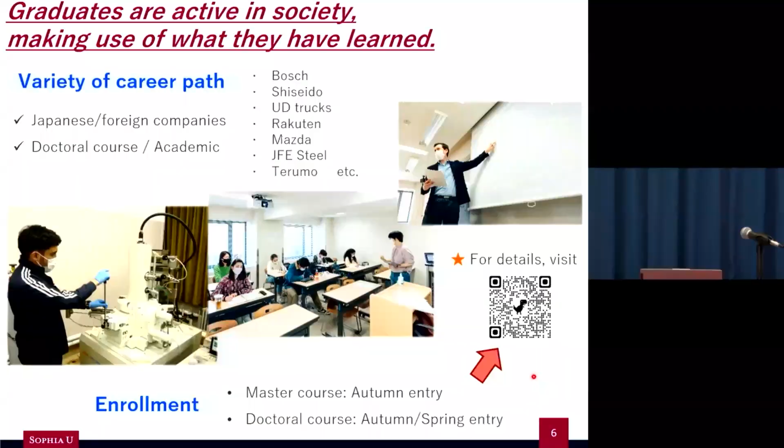Firstly, I would like to introduce myself. There's a point to it. You might ask why is he introducing himself, but we'll get to that.

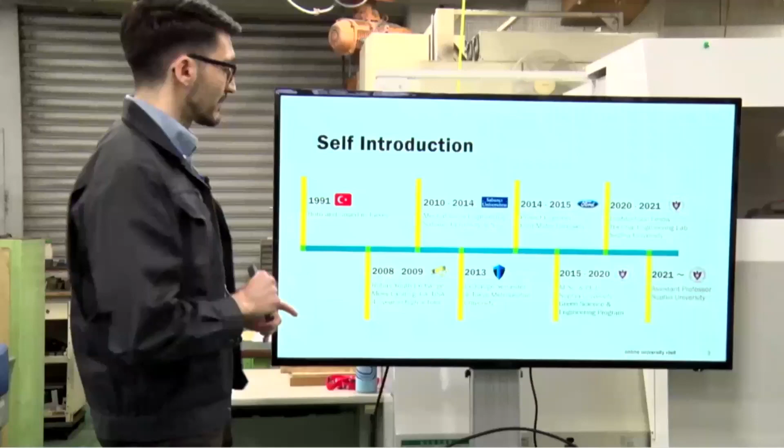Basically, I was born and raised in Turkey. I was there until high school, and in the fourth year of high school, I went to the United States as a Rotary Youth Exchange student. After 1 year studying there, I came back to Turkey and did my bachelor's degree at Sabancı University.

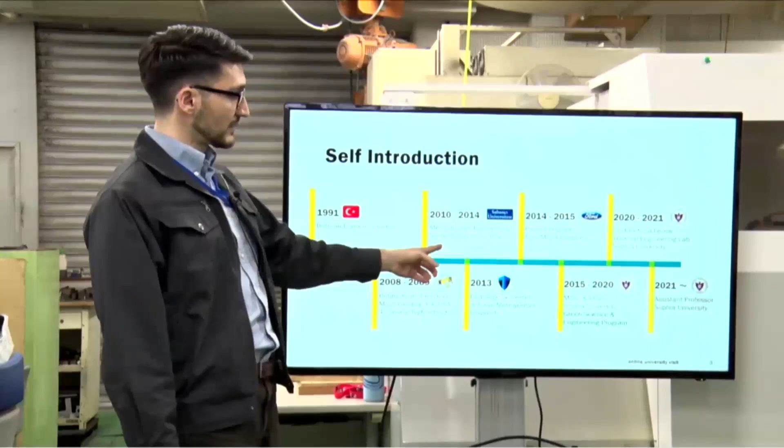During that time, I actually came to Japan for the first time, to Tokyo Metropolitan University as an exchange student, and I was partially funded by JASSO, actually. So thank you very much, JASSO.

After my studies in Japan for 6 months, I came back to Turkey, finished my studies, then got into Ford Motor Company and worked there as an engineer for 1 year. During that time, I realized I wanted to do a bit more technical stuff, and I looked into some options.

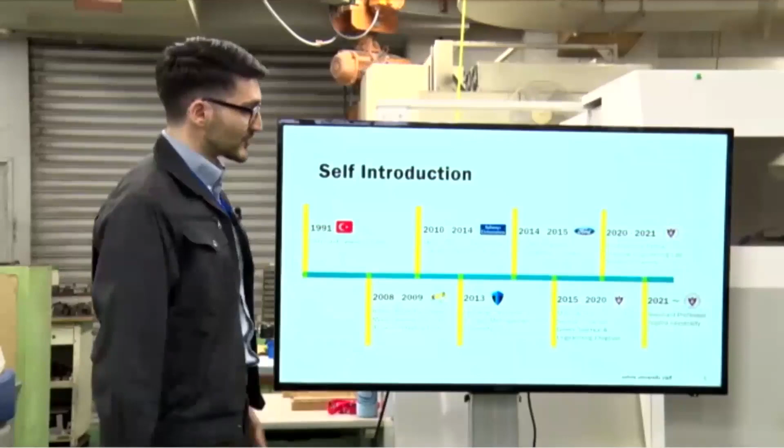As previous professors mentioned, Sophia University had an English program, which I didn't know about, but it came up online. I applied and got into the program, and I am basically a product of this Green Science and Engineering program. I've been here in Sophia University since 2015, did my master's degree, PhD, a postdoc, and since 2021 I work here as an assistant professor here.

So enough about me, let's go back to the university. As previously mentioned, the Faculty of Science and Technology has three different departments. Here in the Department of Engineering, we have 3 different areas. In mechanical engineering, we have 7 different research groups, and today I will talk about precision engineering.

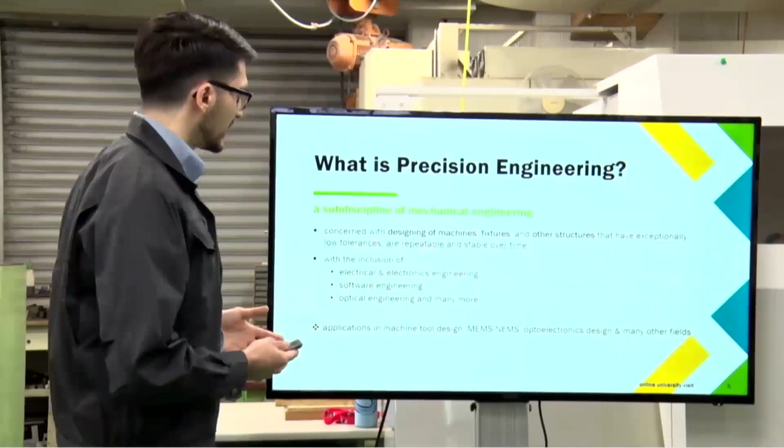So you might ask yourself, what is precision engineering? We can define it in simple terms. It could be defined as a subdiscipline of mechanical engineering. What we mostly concern ourselves with is designing machines, machine elements, fixtures, and other structures that have exceptionally low tolerance. So when I say low tolerance, let's see, this is a pointer.

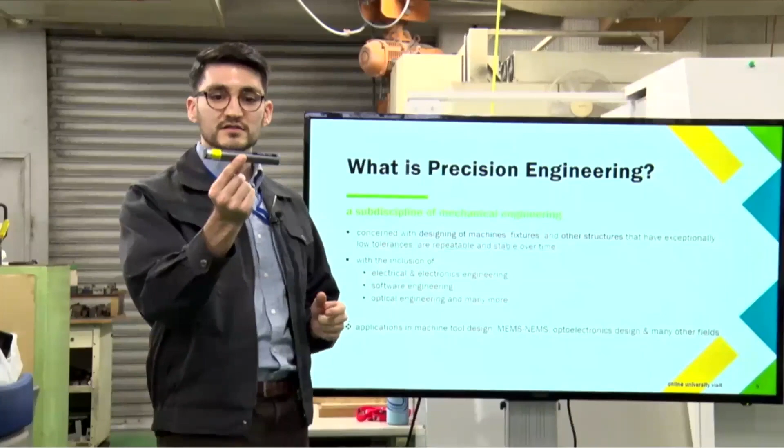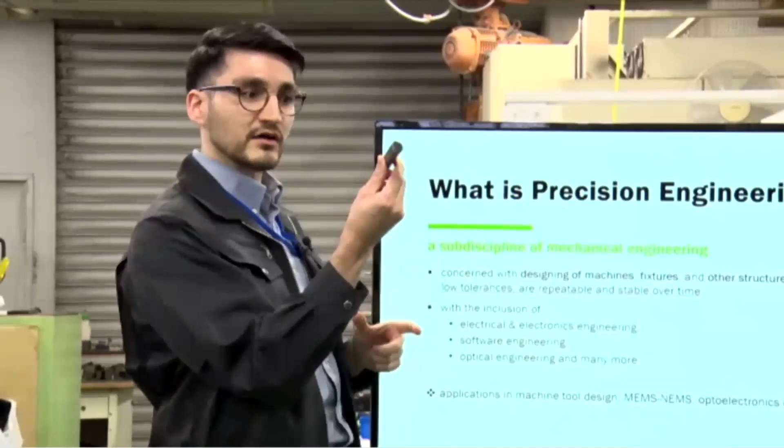First of all, you have to design it on paper, in a computer-aided design environment. So you set a dimension for its length, its width, or its depth. In precision engineering, we like to do those paper-written designs, and when you actually manufacture it, those dimensions need to be matched almost perfectly together. So we are talking about micro,

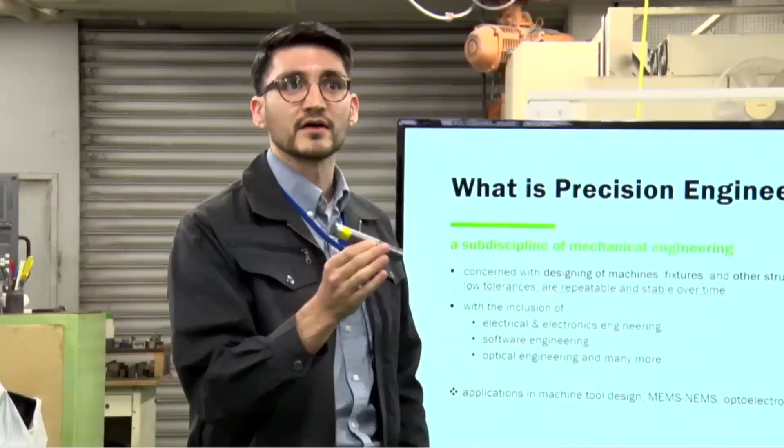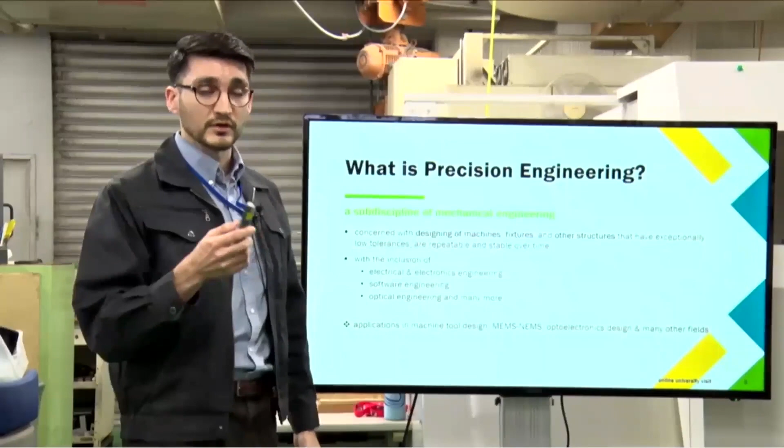nanometer level accuracies. When we do that, if you have low tolerances, you can basically have your products be repeatable, and you know that if you did the engineering calculations correctly, they're going to be stable over time, so you can use them for long periods of time. But of course, precision engineering, even though it's a subdiscipline of mechanical engineering, shortly we will see in our demonstration phase as well that we deal with electrical and electronics engineering, software, and even sometimes optical engineering as well.

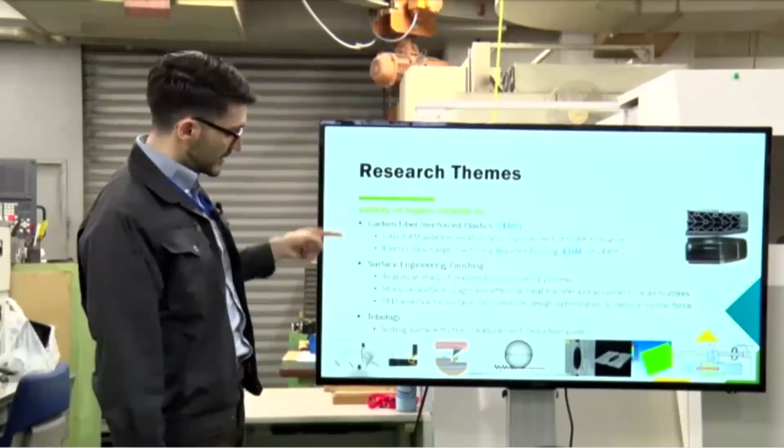For our research team in Sophia University as the Precision Engineering Research Group, we are mainly focusing on CFRP, carbon fiber reinforced plastics. You might have heard about it. On paper, these CFRP materials are hard to process, hard to shape, hard to cut. So in our laboratory, we're trying to find new ways to work on these materials, these composite materials.

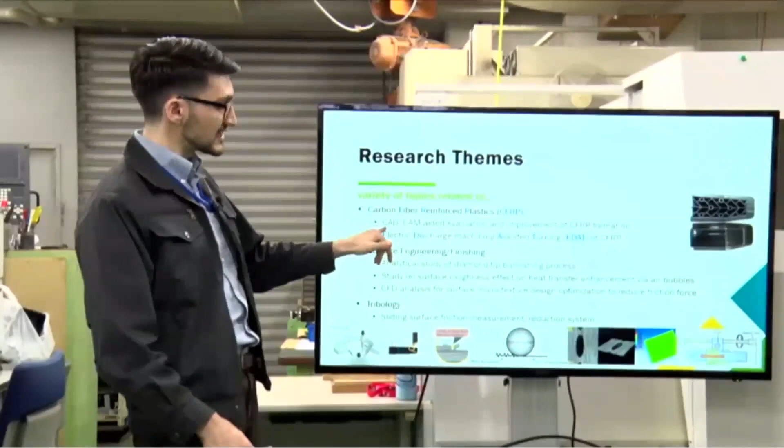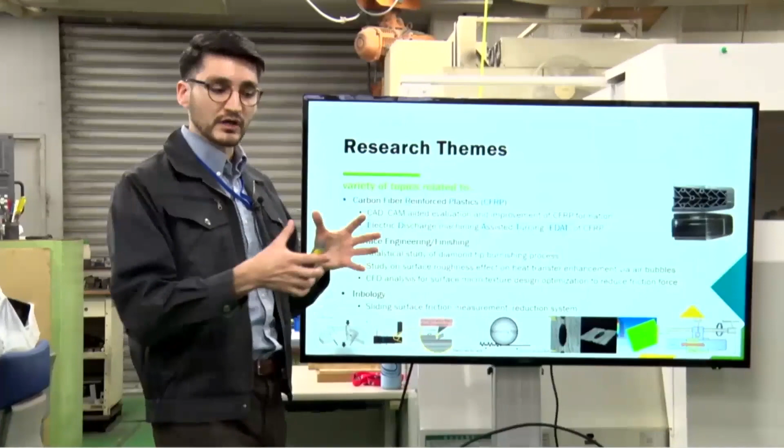So we use CAD and CAM. CAD stands for computer-aided design, and CAM is computer-aided manufacturing. Basically, initially we design everything on computer, we simulate it on computer, and see if we are missing anything. Once we clear all the sections, we go to real life and actually machine the process. So we save time and energy and money, and so on.

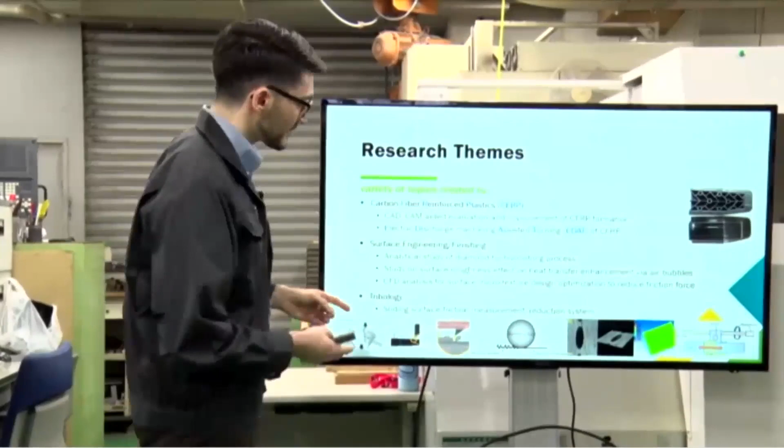We also work on EDM, electrical discharge machining process. We'll have a demonstration of this in a bit, so I'll skip it for now. And we also work on surface engineering.

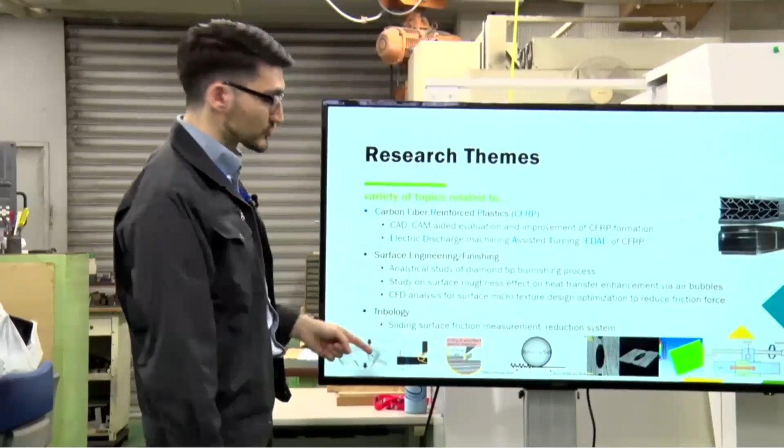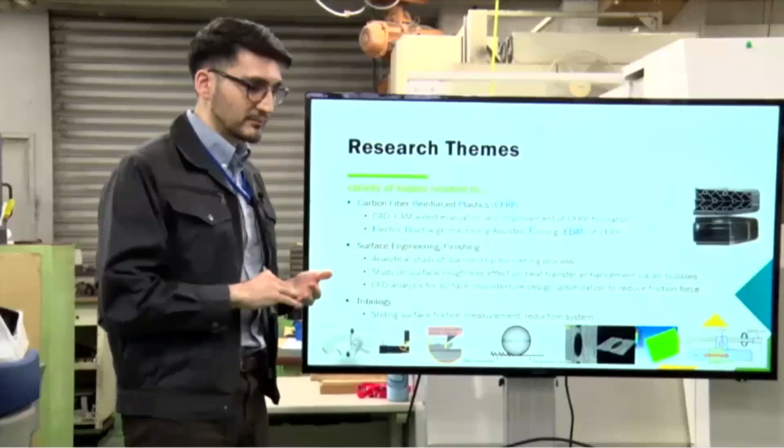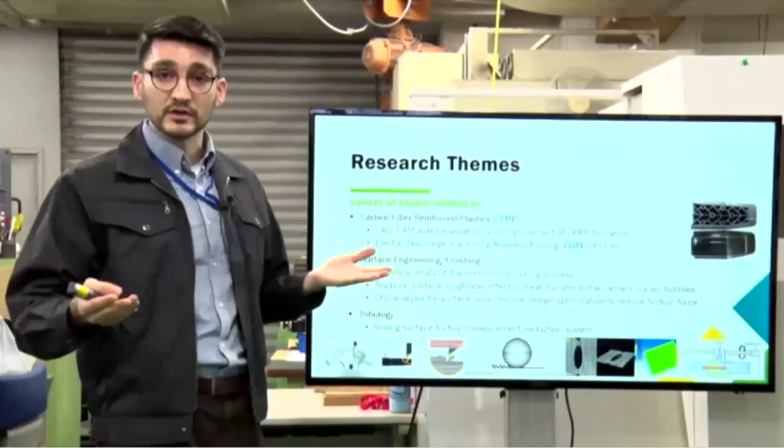You might not really think about it—I didn't either before my master's degree. The surface roughness or feel of your phone needs to be smooth for daily usage, but sometimes you need a sandier surface for different applications. So we try to find the optimum values for heat transfer or friction, and we also deal with tribology, the science of wear, friction, and lubrication.

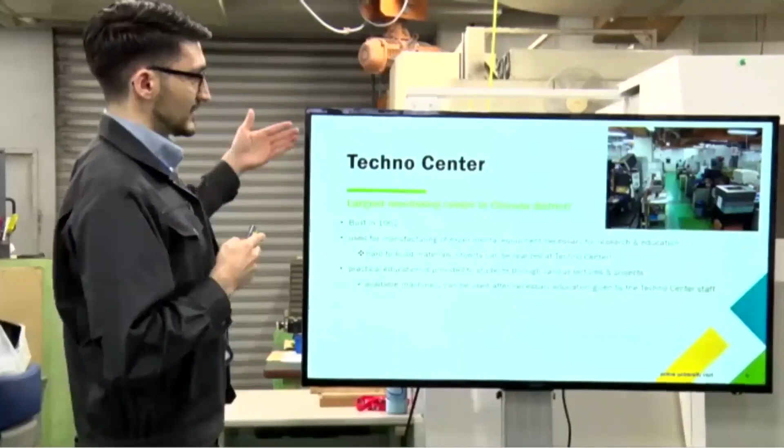In this case, we're building our own experimental setup, which we use right here in Techno Center at Sophia University. This is the largest machining center in Chiyoda district, built in 1962. This facility is used not just by me, but by the whole faculty at Sophia University when they want to manufacture their experimental apparatuses.

When they want to do new research, they might need parts or materials. They come here and talk to our professional staff, and we get help from them. As students at Sophia University, you also have the opportunity for practical education. We have more than 30 machines here, from big to small sizes, so you can learn how to use some of this machinery during your studies.

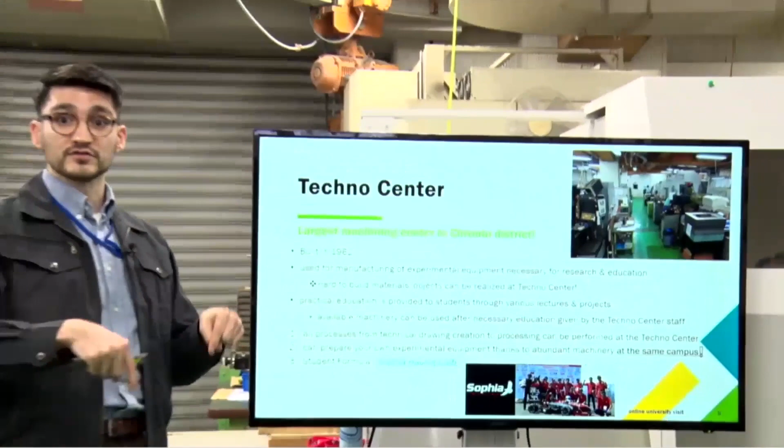We also have a Sophia Racing Club. This is a student club, entirely run by students, and they sometimes come to us to discuss ideas. They also design their own cars and come to the Techno Center to build the materials. These are some of the available machinery we have.

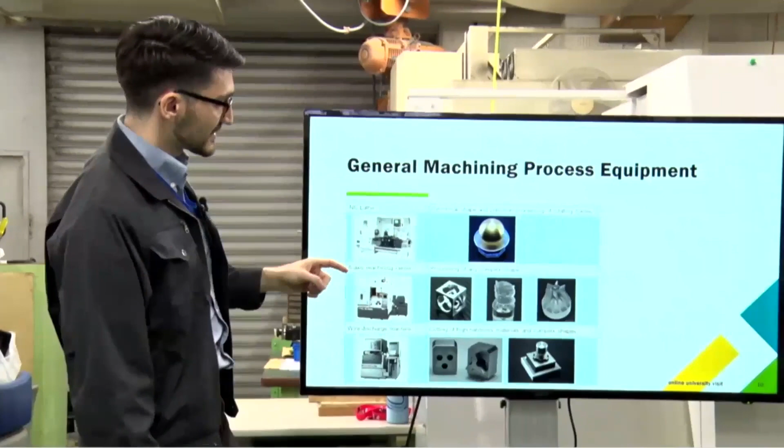This Takisawa machine is right behind us. If you come to Sophia University, I'll show you how to use this one. These are some of the processes we can do, like spherical shapes—even though it looks simple, when you think about how it's manufactured, it's another concept we can learn and study here.

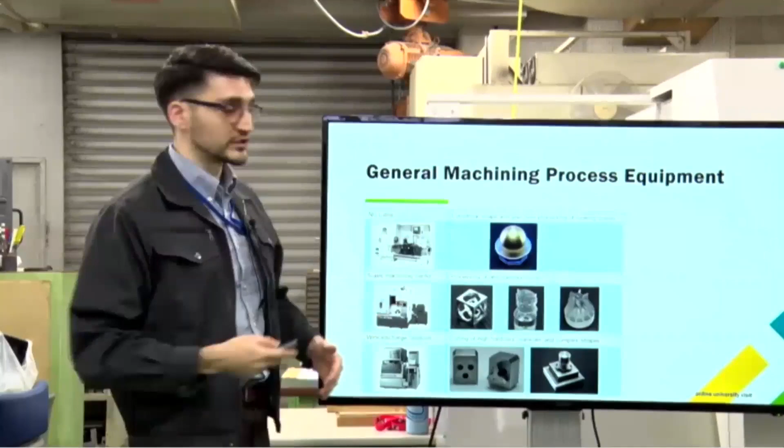My office is only two stories up, so it's very convenient for me to come and work on new technologies for manufacturing things more precisely. All right, that's my explanation for now. So let's move to the demonstration section and see how we deal with CFRP materials. All right, let's go.

We're going to move to another smaller area where we have a specific lathe, and Mr. Yuta will talk about the machining processes. Hello everyone, my name is Yuta. I'm a first-year master's degree student in the Precision Engineering Lab. Today I will demonstrate the EDM-assisted turning process.

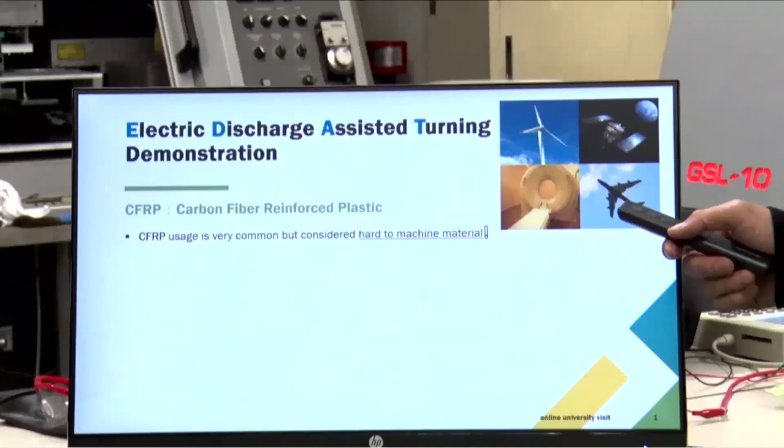EDM is electrical discharge machining, where tiny but powerful sparks are used to erode the surface of the workpiece. In our lab, we try to process carbon fiber reinforced plastic, CFRP. If you ask why: CFRP is lighter and stronger than metal, and has excellent corrosion resistance and durability. This is why demand for CFRP has been increasing in recent years. We see its usage in wind turbine blades, planes, satellites, and even in the health sector.

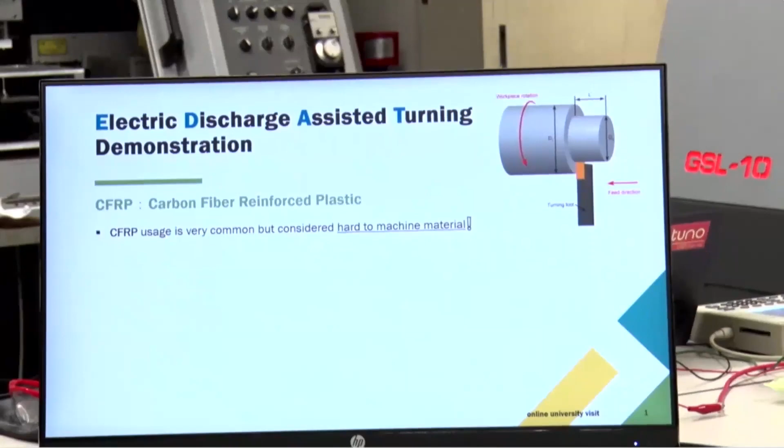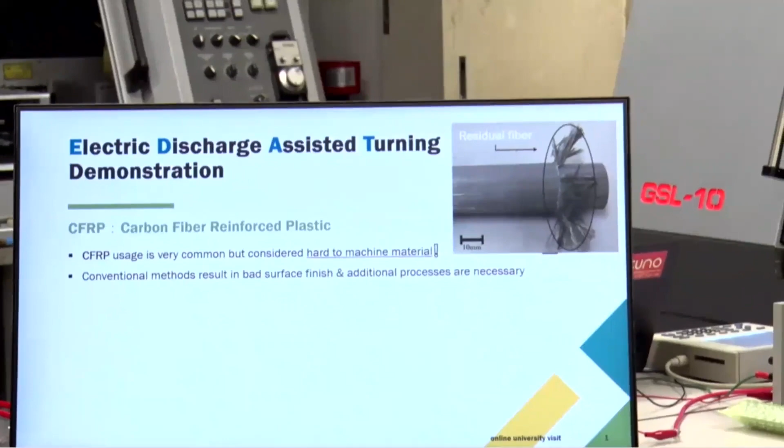However, conventional turning of CFRP is hard to cut. Conventional methods result in bad surface finish, and additional processes are necessary. If you try to cut it with a conventional method, the end product looks like this. Carbon in the CFRP material is conductive. Using this fundamental knowledge, we propose combining the EDM process with turning.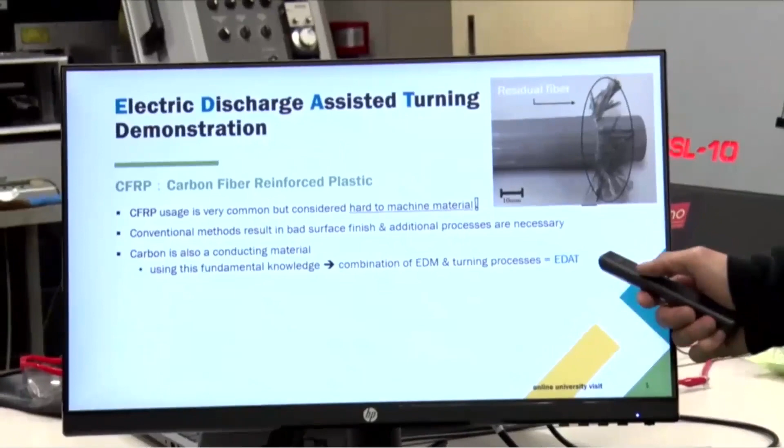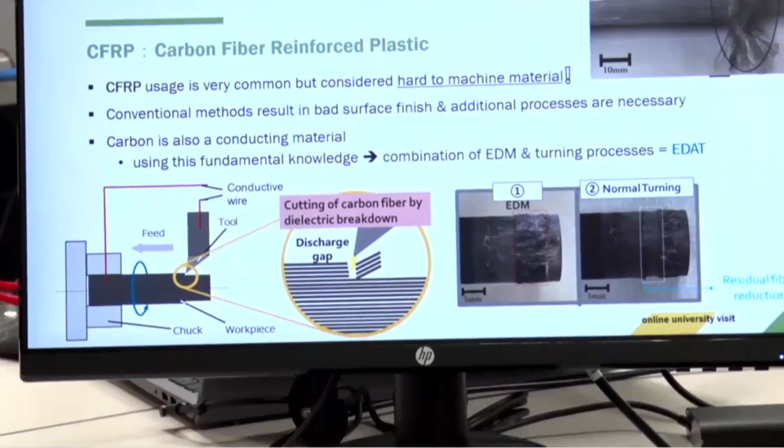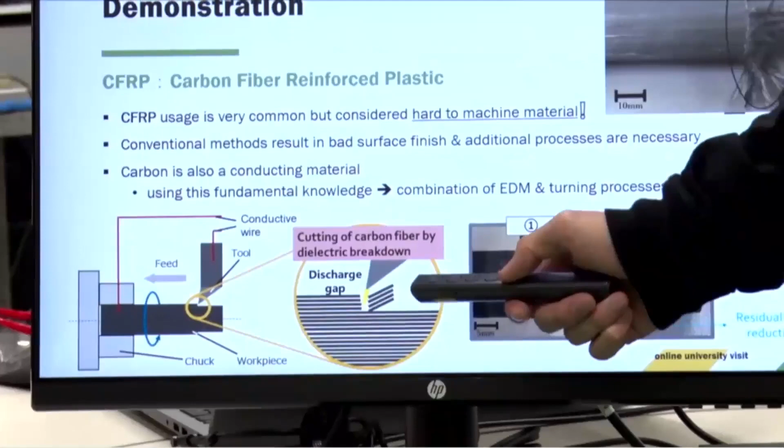This is named EDAT, for electric discharge assisted turning. EDAT is a two-step process: first the EDM process takes place, then the normal turning process. This figure shows how EDM works, and this is a schematic diagram of the lathe. A discharge gap at the micrometer level is created between the tool and the workpiece, and we erode the carbon fiber through electric sparks flowing through the insulating air.

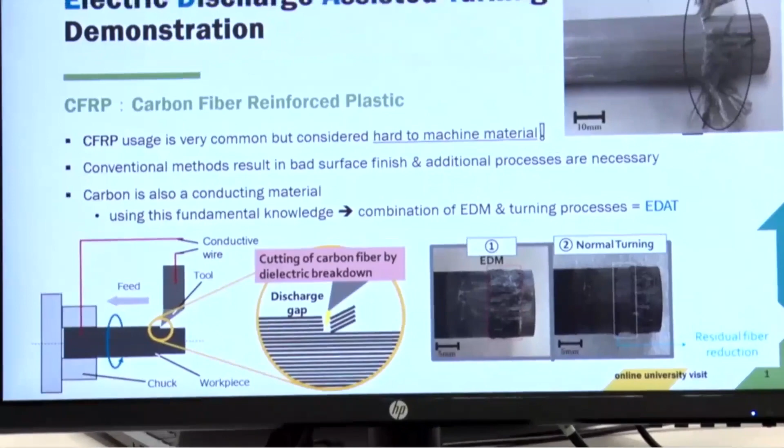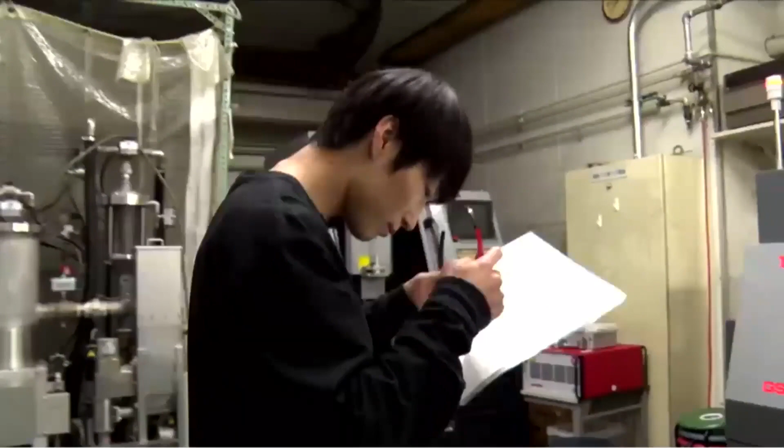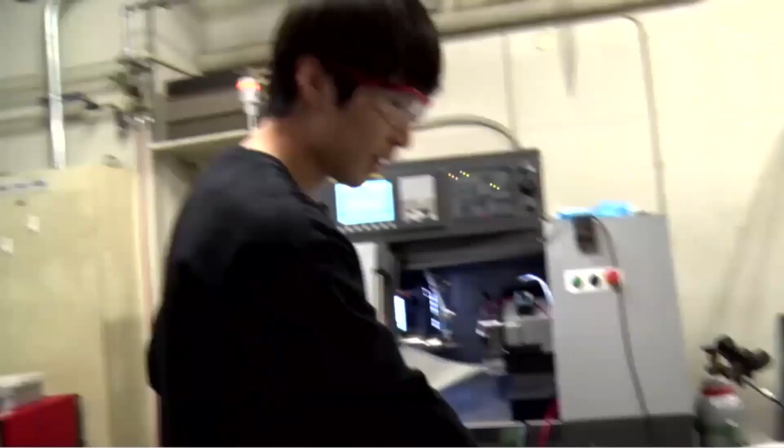So let's see how it looks in real life. Here is the electrical circuit board, and this is the software we load. This is the tool, a copper electrode, and this is the workpiece, CFRP. Please come closer and see the actual process.

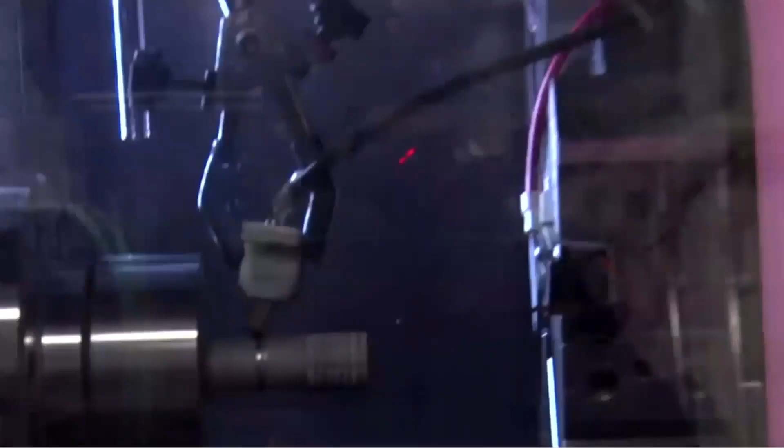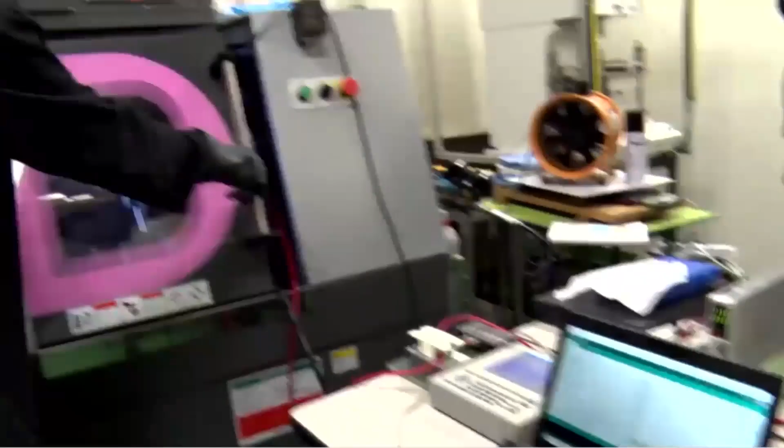It will be fast, so please pay attention.

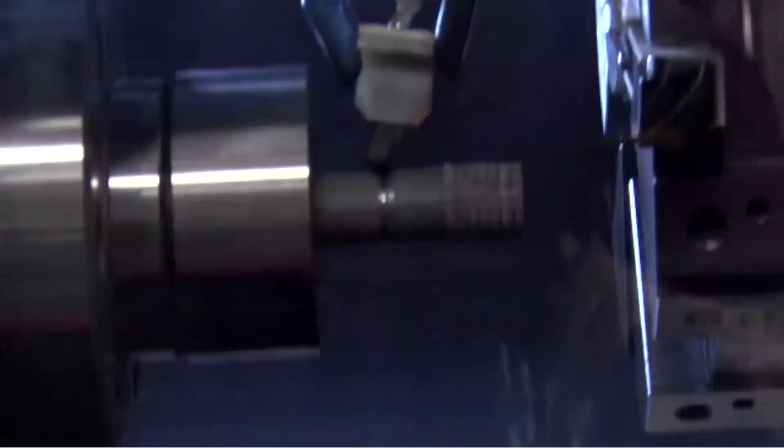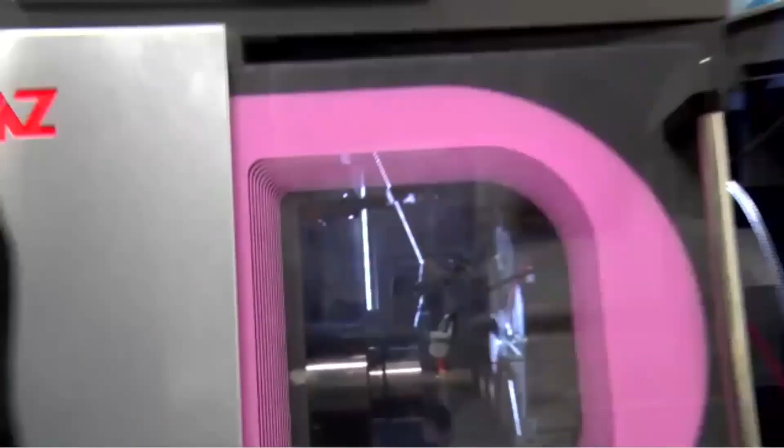This is the conventional method—you can see residual fiber. But if you use EDAT, the end product gives a clean surface. This is the end, thank you very much.